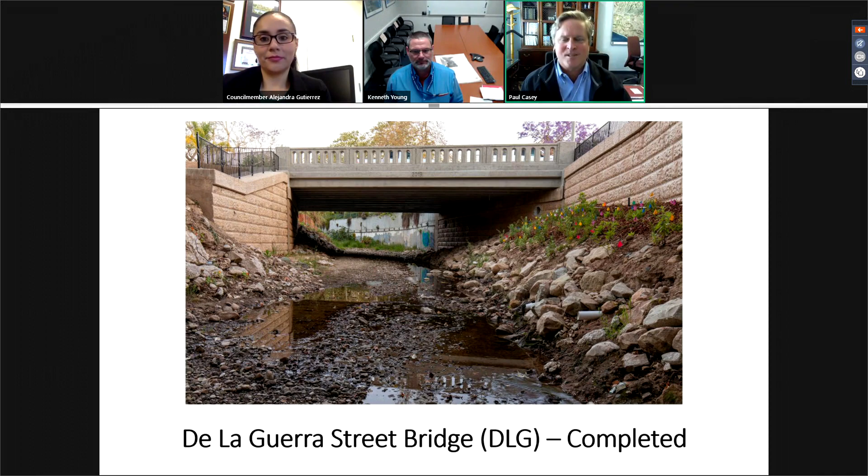We're excited to be here and to celebrate these two bridge projects and appreciate you participating today. Thank you to our partners, especially our residents, for all of your support for these critical infrastructure projects and working with us through the construction phases. Really appreciate your cooperation.

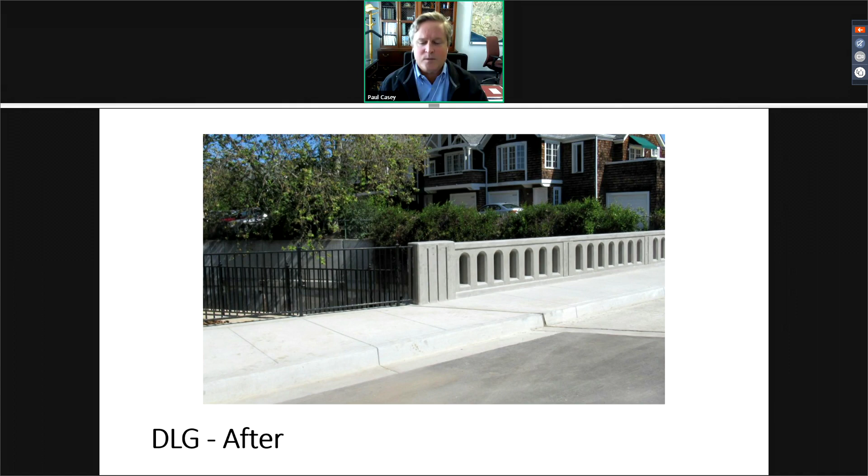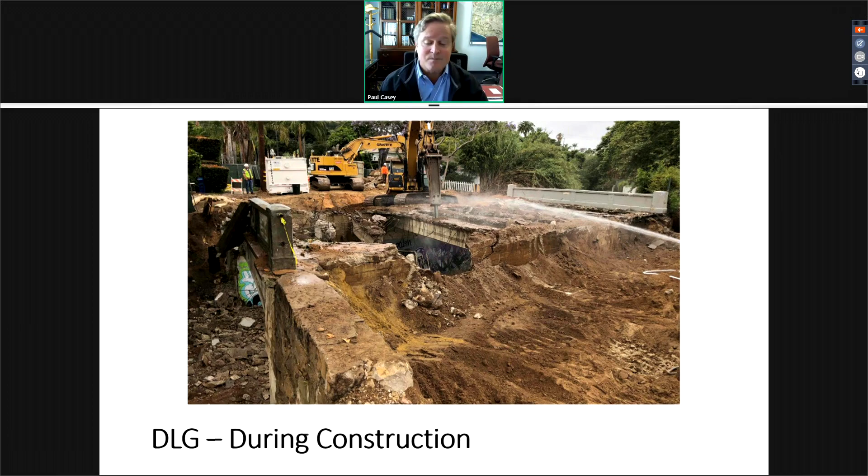Many community members and organizations participated in the development of these projects. The projects were vetted through various public meetings and the city's Architectural Board of Review, design review and approval process. They helped with the selection of the channel wall treatments and the intricate details of the bridge, including the types and color of the railings, the fence, barrier rails, and pedestrian lights installed as part of the project. These make really great architectural assets to the community that we can all appreciate and enjoy for years to come.

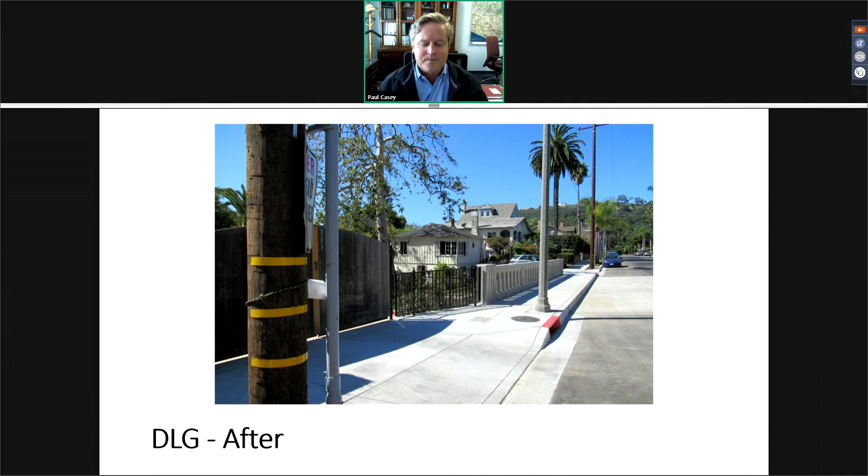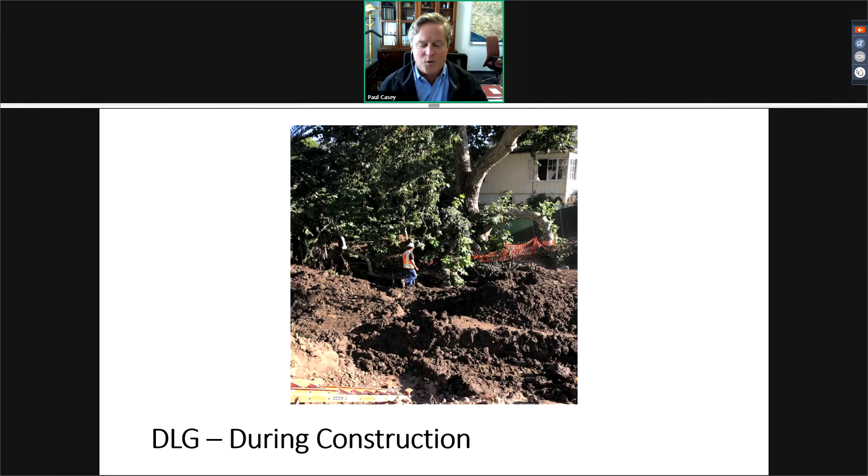Outside agency project partners have also been really great to work with, and they include the Santa Barbara County Flood Control District, Caltrans, and the Santa Barbara County Association of Governments. A special thank you to the Highway Bridge Program administered by Caltrans, which provided the funding for these important projects. Over 90% of the funding came from the bridge program, and the city received approximately $13.2 million in total grant funds to design and construct both of these bridges.

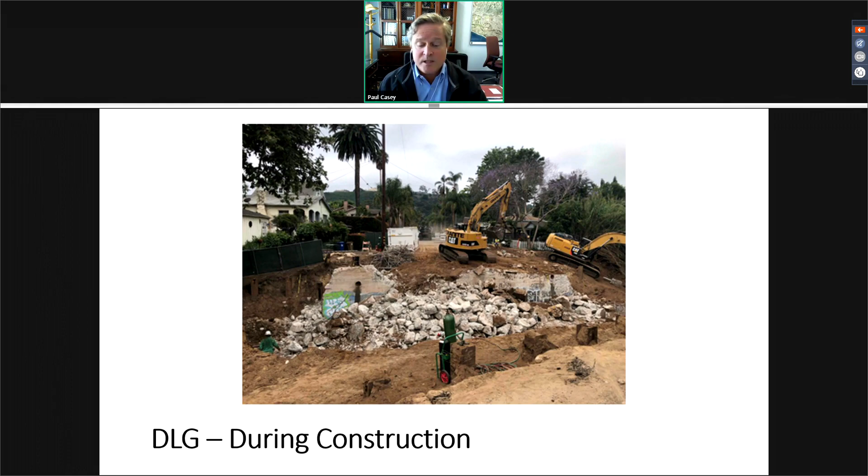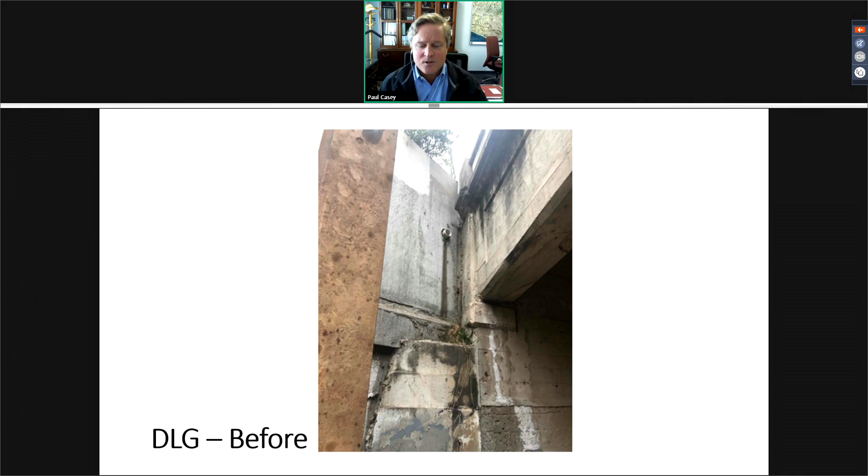Both bridges were determined to be structurally deficient based on routine inspections by Caltrans, and therefore they qualified for a complete bridge replacement under the program. Again, thank you for attending this virtual ribbon cutting, we really appreciate it. At this point, I would like to introduce Councilmember Alejandra Gutierrez, who will provide a little more background information on the Quinientos Bridge.

Thank you. We can't hear you.

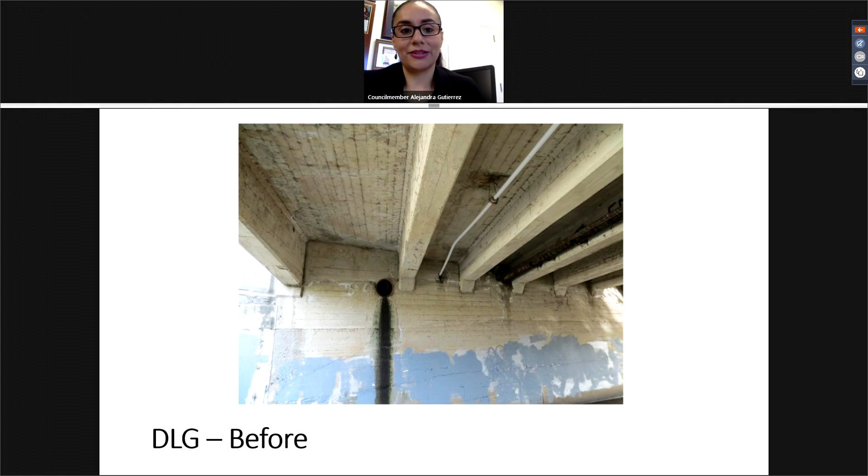Thank you, Paul, and members of the public. Special thanks to the Eastside neighborhoods for their patience and cooperation during this one-year-long construction project.

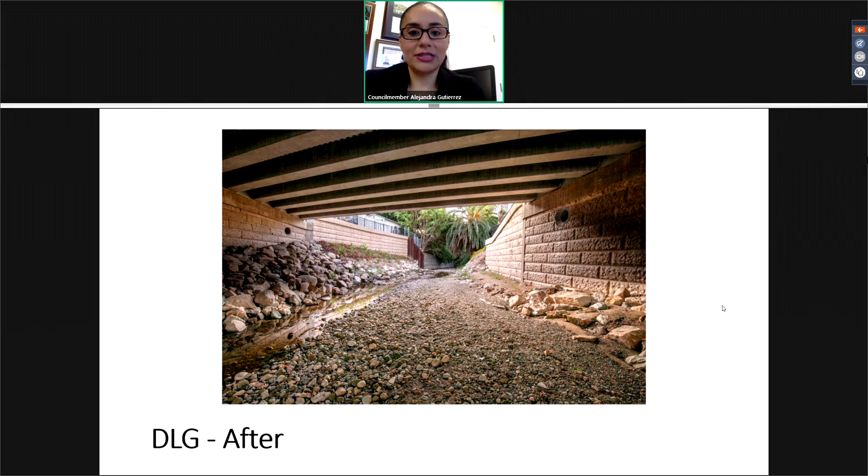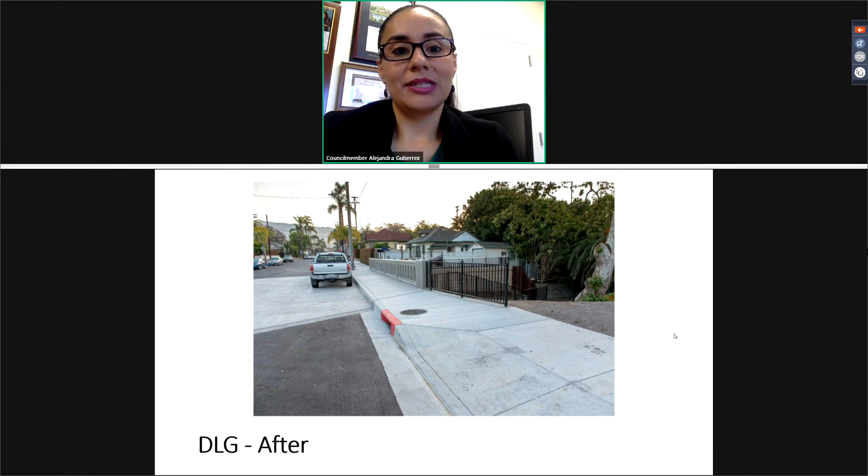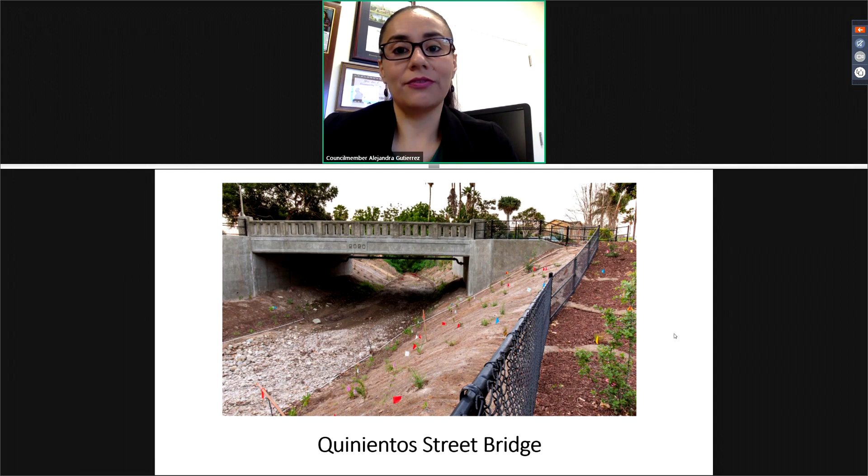The Quinientos Bridge was originally constructed in 1930. It was 36 feet long and 30 feet wide, and it was quite difficult to navigate through. The bridge was straight, but was located on a curve in the roadway, which limited the sight distance for drivers, putting one of the crosswalks on Canada Street in a blind spot. The old bridge had narrow sidewalks and didn't provide enough room for vehicles and cyclists to comfortably cross the bridge at the same time.

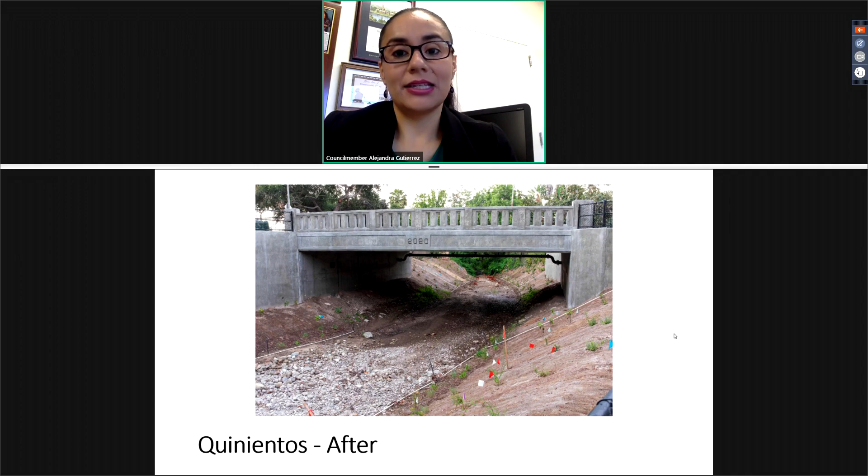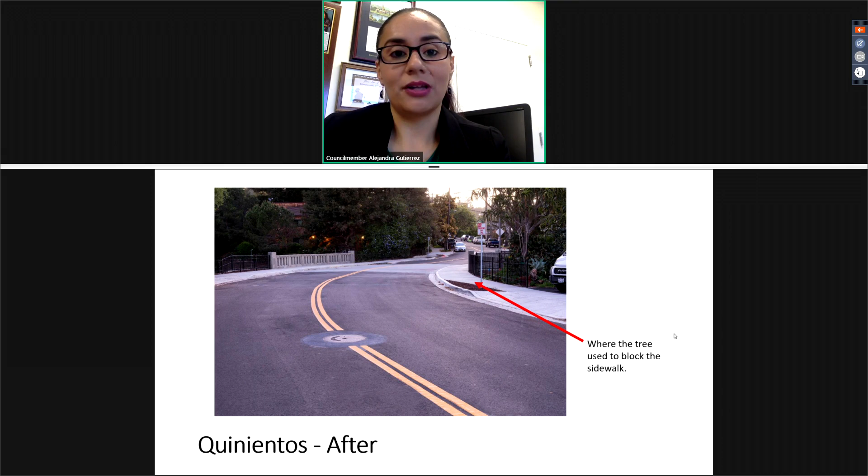The new bridge is about 45 feet long and 52 feet wide, which provides a 6 foot wide shoulder for bicyclists and a 6.5 foot wide sidewalk along both sides for pedestrians. It not only provides better sight distance for drivers, but this new bridge is designed to meet current city, state, and federal standards. The project also includes new pavement, curbs, gutters, street lights, handicap ramps, and concrete sidewalks, improvements adjacent to the replacement bridge, which include all of the safety elements to make this corridor safe for all users.

The creek banks were revegetated with local native riparian species, including plantings in all areas disturbed by construction activities. Creek restoration was also an important feature for this project. The total project cost to design and construct this project was $6.1 million. About $5 million was for construction, and the project was nearly entirely grant funded.

This is such an important project for the Eastside neighborhood, and we appreciate all of the hard work that went into it. Now I would like to introduce Mr. Ken Young, who will provide more details about the construction.

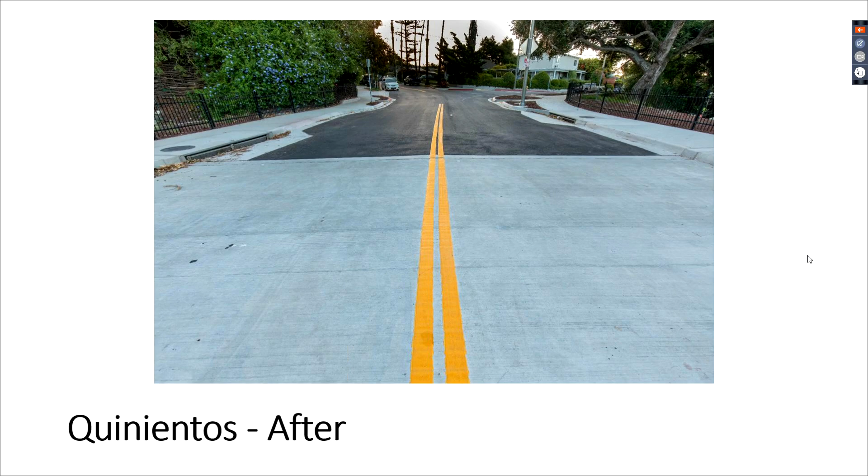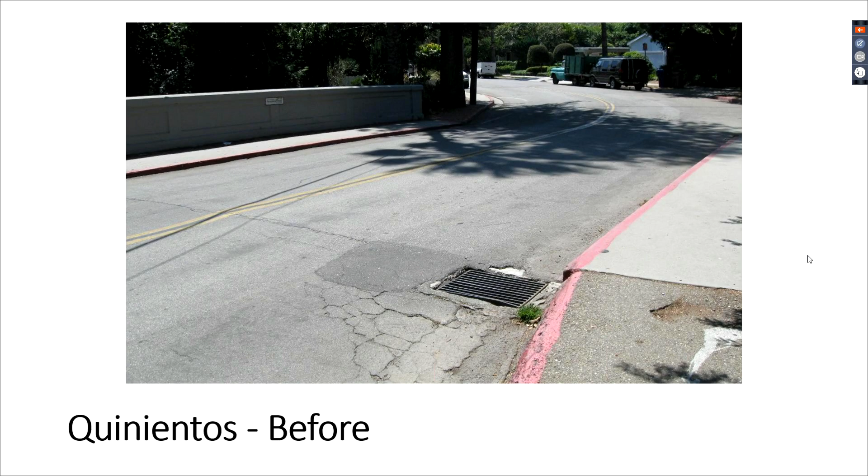Ken, you need to turn on your camera, please. Good morning, everyone. All clear, right, Rochelle?

I am Ken Young, construction manager for the construction of the Quinientos Street Bridge. Before construction even begins, you have about 8 years worth of design and planning. A lot of that happened here in this room that I'm talking to you today from.

When this project came to us, when it started just about over a year ago, we were given a lot of time constraints to be within the creek window to construct and then get out of the bridge creek. One of the interesting things that happened on this bridge is we had a bunch of birds that decided to nest under the bridge right about the time we wanted to construct it. So we had to delay the project by a few weeks to hit that window.

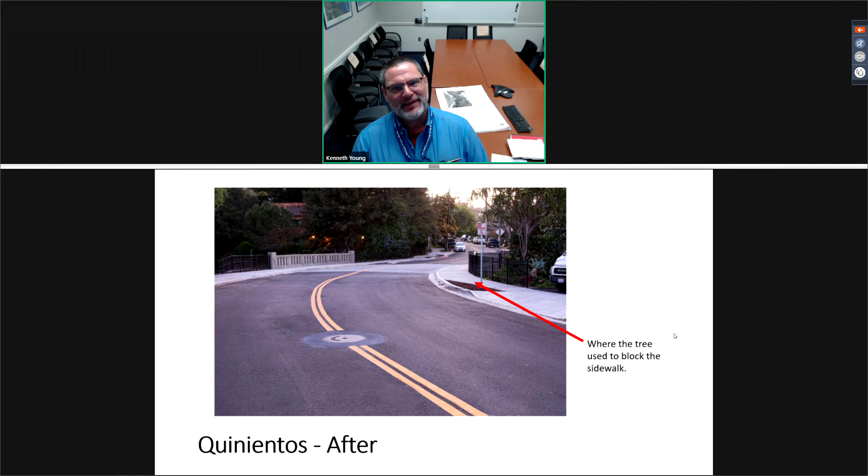In construction, we had Lash Construction. Jim Lash, Brendan McNamara, and Hector Hernandez worked very hard on getting this project going during construction, with all the tribulation that we had. They did a very excellent job, and everything pretty much ran on time.

We got a lot of help from Filippin Engineering, who was our structural representative. That would be Matt Davis. And he had 3 inspectors who worked on this job from beginning to end, that would have been Marco, Jerry Missamore, and Raul Estrada.

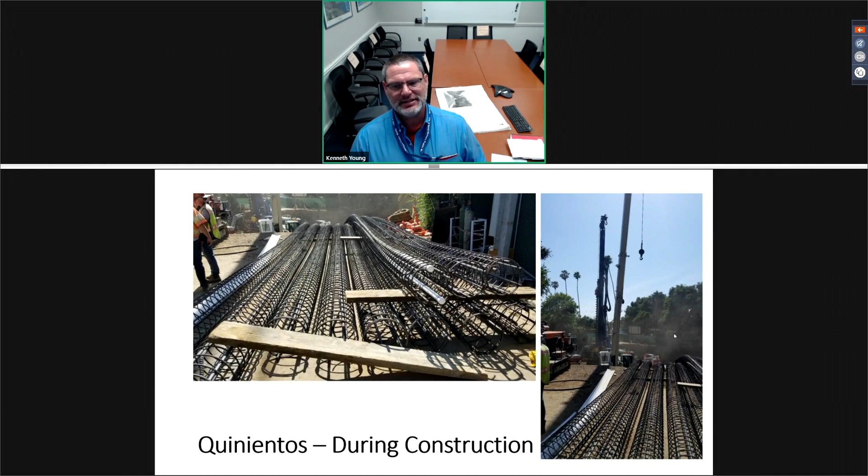Also, to verify that we were making all the compliance with the regulatory agencies, was Stephanie Lopez and Julie Love from Rincon Consultants. They did a very excellent job. Any time there was an unknown, we would call them up and say, hey, is it okay for us to trim the tree here? Is our red-legged frog where it needs to be?

On city staff, there's a few people that need to be recognized. That would be Ruby and Sarah Isa, who helped us with all the permit requirements. And then also Alex and Regina worked on the construction management side, getting things going with typing minutes and coordination efforts.

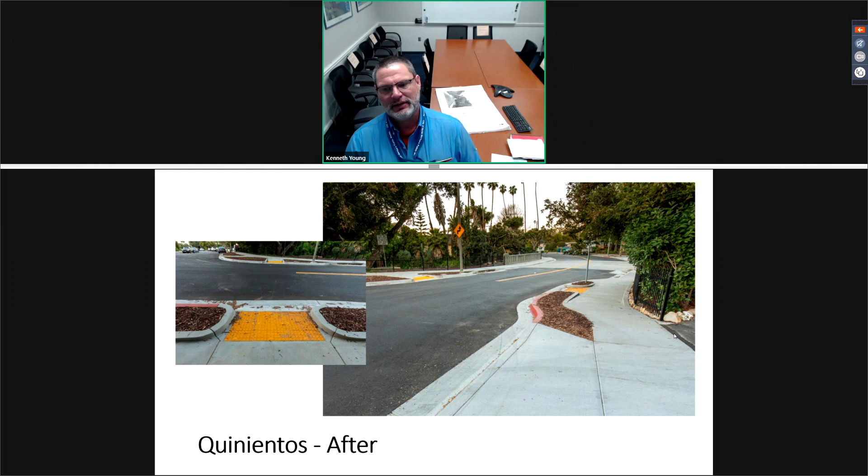At this time, we also like to make a specific thanks to the East Side neighborhood and Caltrans local assistance, Heidi Borders and Leaf Corlell, and they did a wonderful job.

Thank you guys for participating in this unconventional ribbon cutting, and go check out the bridge to be in the outdoors. And then good luck to all of you.

And at this time, I would like to introduce Councilmember Megan Harmon.

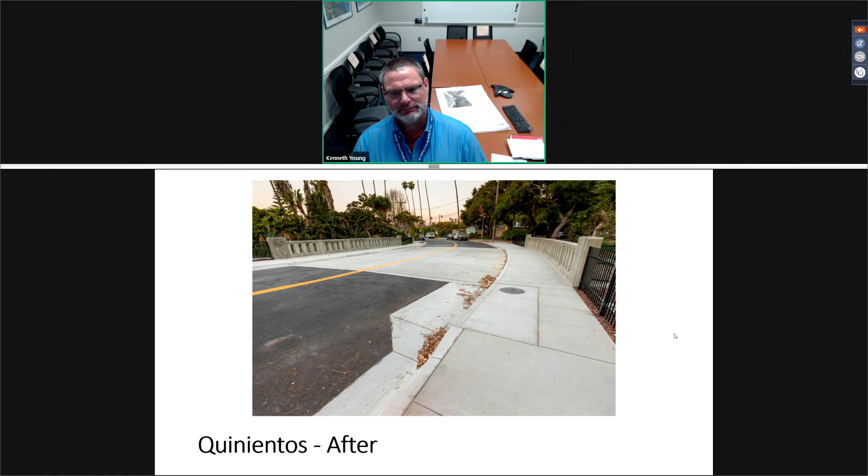Thank you so much, Ken, and thanks to all of you for being here. It is a little bit different, as Ken said, for us to be doing a ribbon cutting virtually, but I'm so excited that we are still taking the time to celebrate these kinds of projects, because this is really the heart of what we do at the city, and it's what makes our community so awesome. Our commitment to keeping everything looking good, and most importantly, keeping it safe for our neighbors.

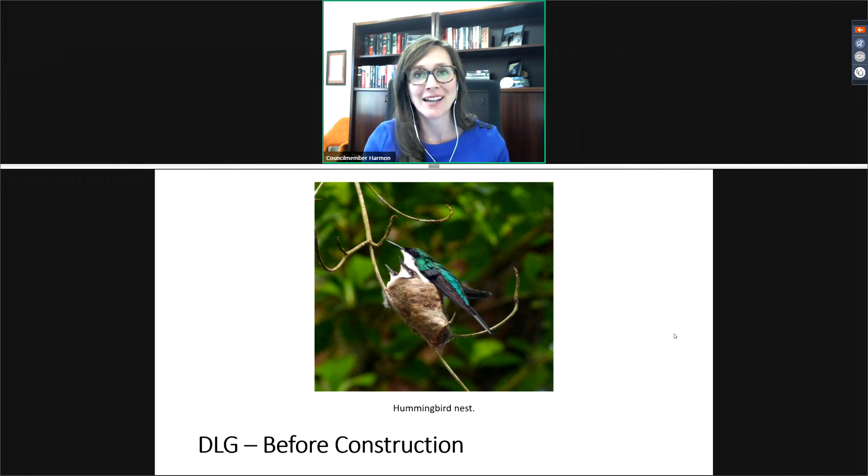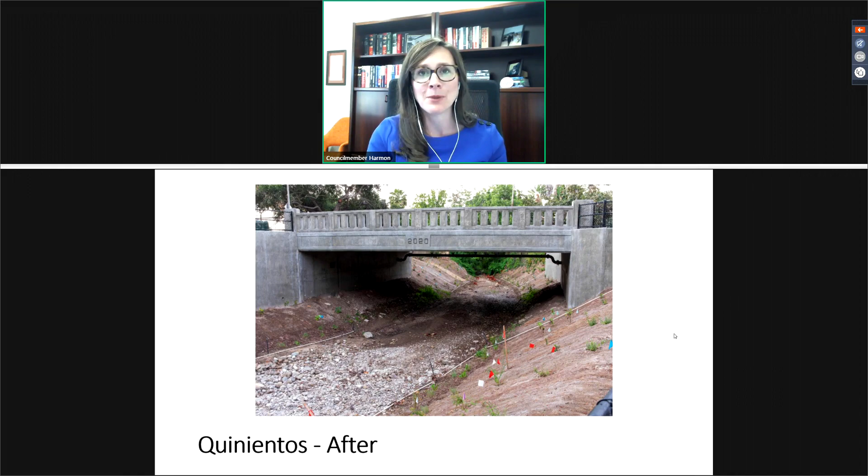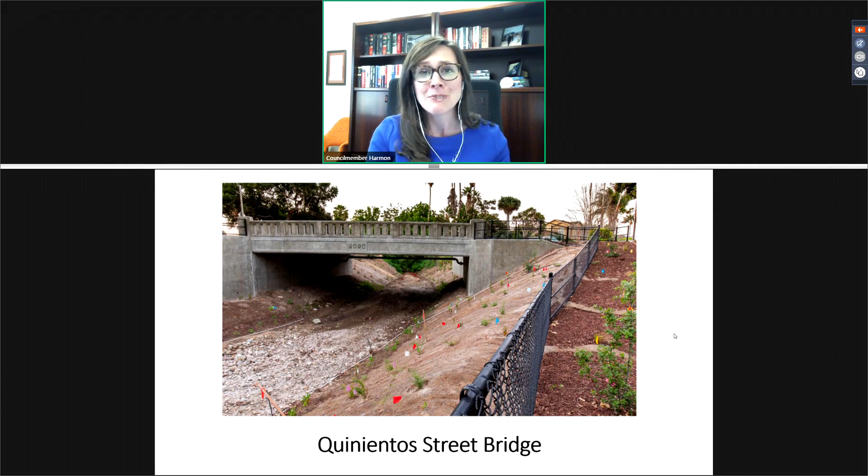So on that note, I'm going to start by thanking our downtown residents and the downtown neighbors of the De La Guerra Bridge. I actually live in that neighborhood myself, so I totally understand the level of patience and cooperation that was required from the surrounding neighbors to get through this project. But it's certainly all worth it now when we see the incredible craftsmanship of the bridge. It's made a huge difference in our neighborhood, both in terms of safety and in terms of aesthetic. It looks awesome. So I know we're all so grateful and really excited about it.

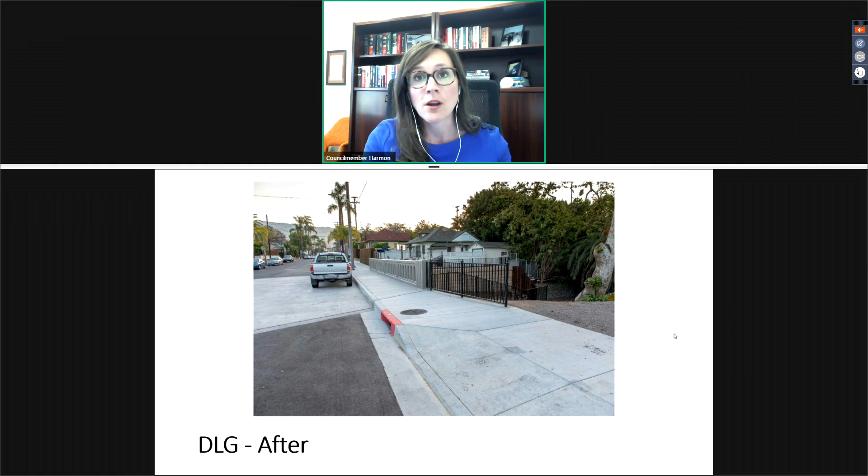So I want to just share a few details with all of you about the De La Guerra Street Bridge. It was originally built in 1914. It was 31 feet long and approximately 60 feet wide. I'm told that the deck was severely deteriorated, and that's why we qualified for the funding for a complete replacement. So it's good we did this project when we did.

The new bridge is 61 feet long and 55 feet wide, large enough to carry at least 3,400 cubic feet per second of design flow of Mission Creek. I don't really know what that means, but I'm told it's a very good thing.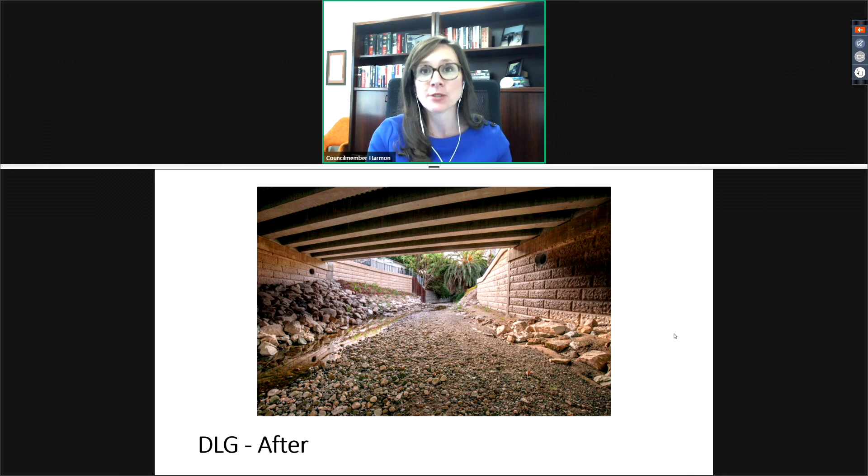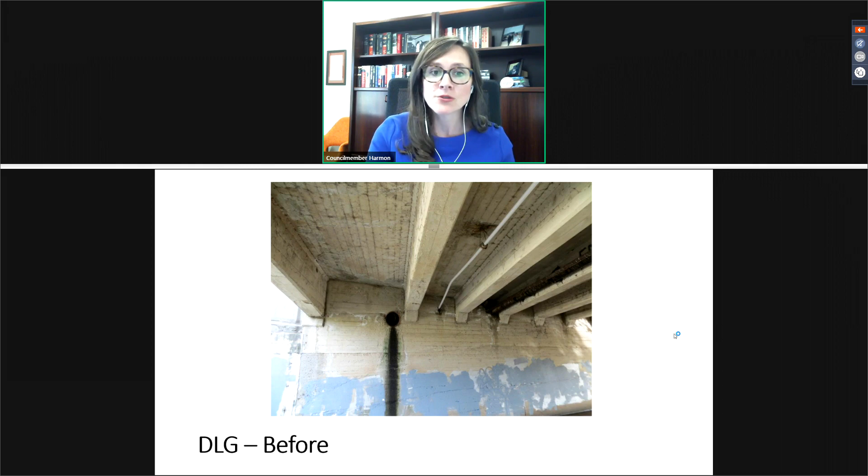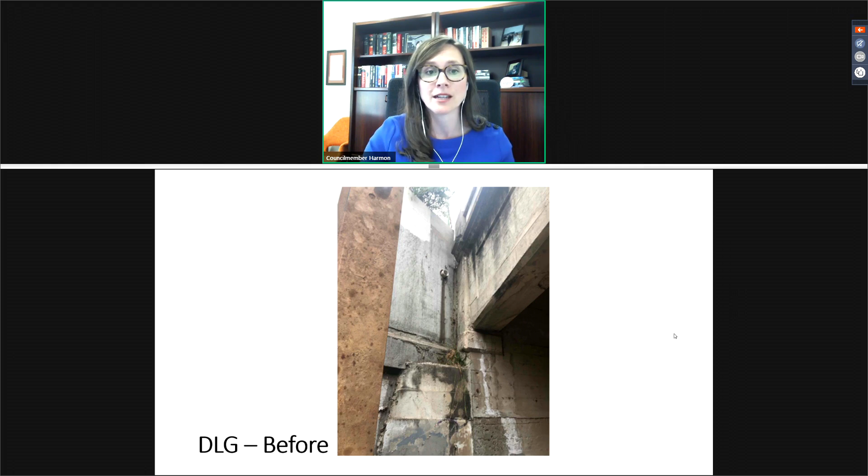The completion of this bridge not only fulfills the transportation safety elements, but it also fulfills the intent of the Lower Mission Creek Flood Control Project, which has been a really cool joint effort between the city, county flood control, and U.S. Army Corps of Engineers. The purpose of that is to make sure that we have flood reduction along Lower Mission Creek so that all of us that live in the surrounding neighborhoods can stay safe in the event of a flood.

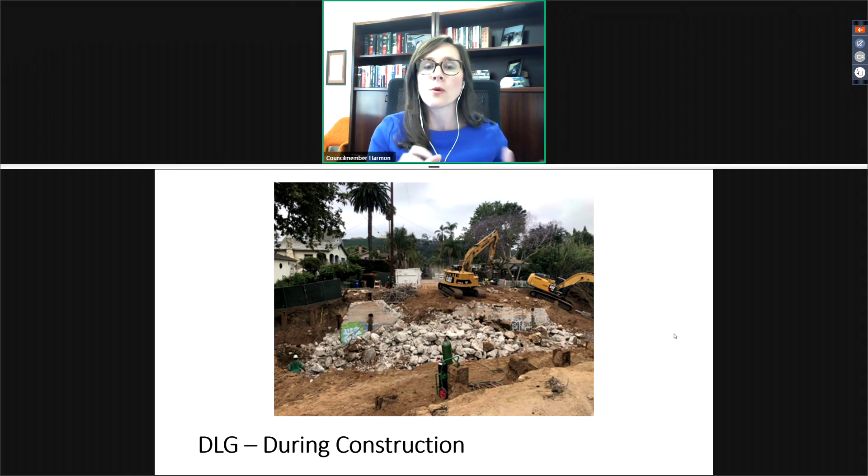So what this actually means tangibly is that the project is to widen the Lower Mission Creek channel, and that increases flood capacity. So what that means is flooding will be reduced and property damage to the surrounding areas will be reduced as well.

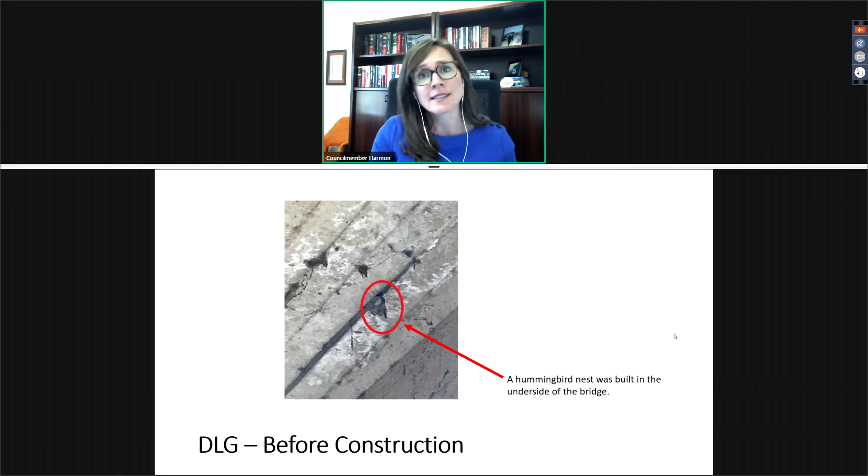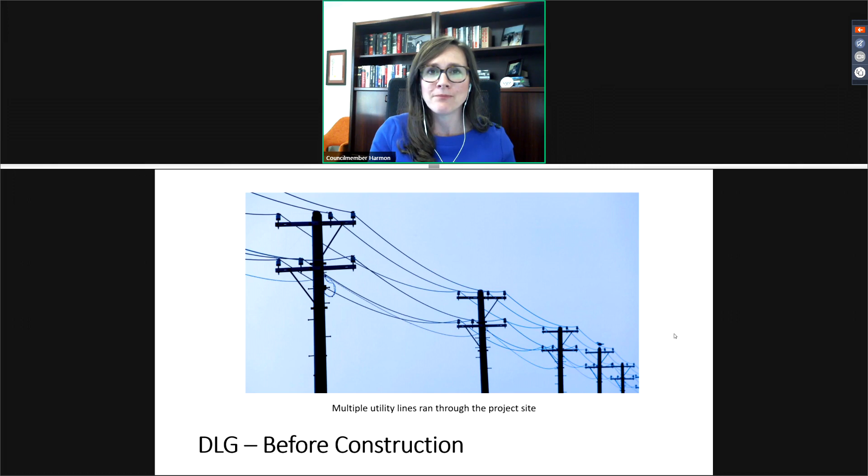And it gives us the opportunity to rehab the creek as well as to make specific habitat enhancements, which is really important to us as a community. We are certainly concerned with property damage and want to keep everyone safe, but we also want to care for our environment and make sure we really think about how we're sharing this earth and do what we can to protect our natural habitats.

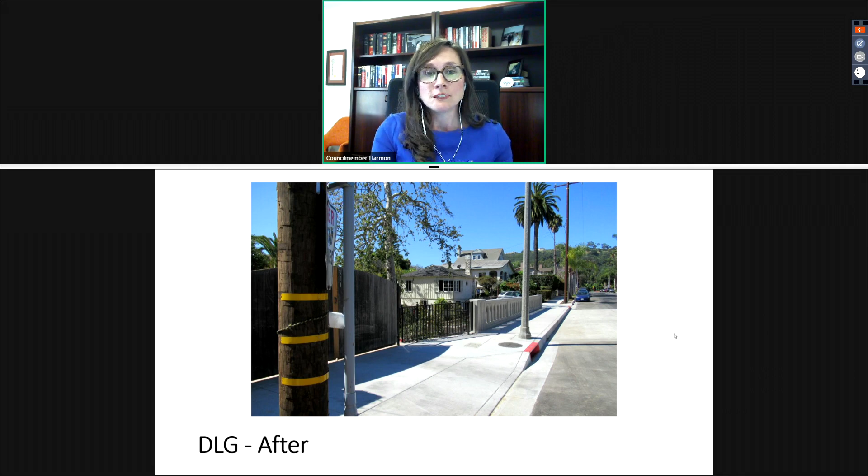This effort is really cool. It spans approximately 1.3 miles of Lower Mission Creek, starting from Cabrillo Boulevard and going all the way to Canon Perdido Street. We at the city, along with the county, are committed to moving forward with completing the design and construction of the project with grants and local funds in affordable increments of work.

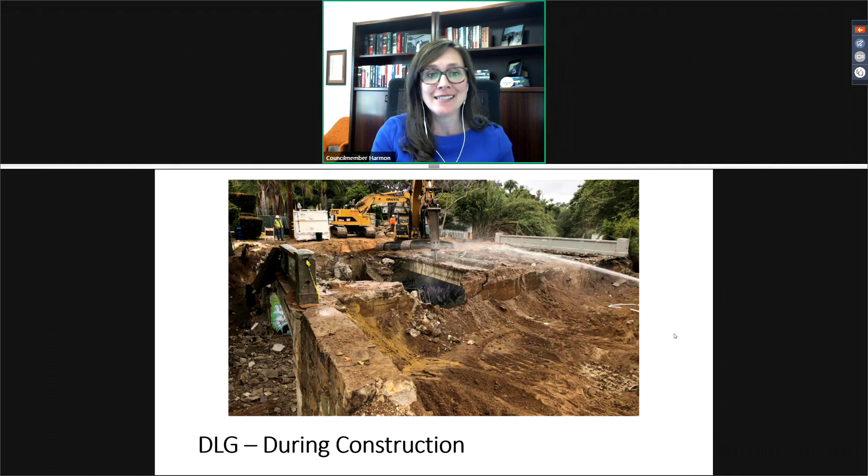Progress has really been made. I'm really excited to say that this is actually the 7th bridge replacement as part of that whole effort since 2011. That's a really big deal. The bridges replaced so far include Haley, Ortega, Chapala, Cota, Mason, Cabrillo, and now the De La Guerra Street Bridge. The county's also completed a number of channel reach widening projects, and they continue to make good progress.

They also have plans to construct and widen portions of the channel reach just north of Highway 101 to the upstream end of the Gutierrez Street Bridge next summer. So we really look forward to that.

I just will close by thanking everyone who was involved in this project: city staff, construction, design. It really was a team effort. Thank you to the neighbors who were so cooperative and patient. This is a win for those of us that live downtown. It's really something to be celebrated, and I'm so happy that we're taking the time to do that today.

Now, I'd like to introduce the construction manager, Laura Yanez, who's going to give you all a few more details about the De La Guerra Street Bridge.

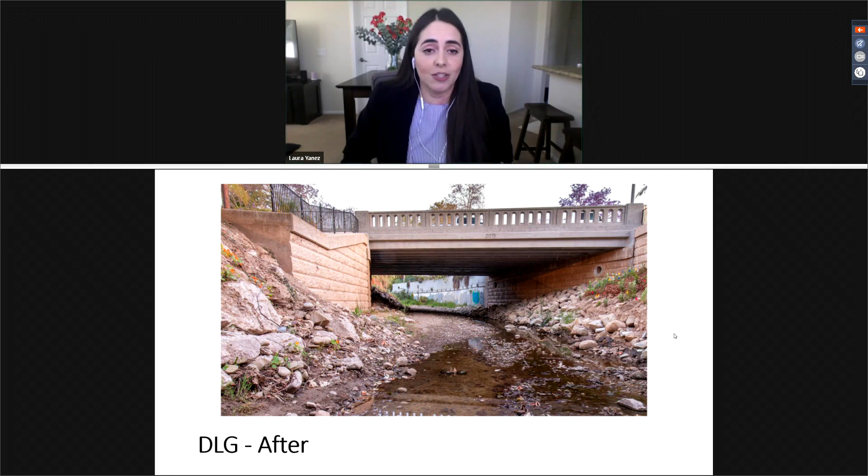Thank you, Councilmember Harmon. Good morning. It is with great pleasure that we meet today for this virtual ribbon cutting for the De La Guerra Street Bridge project. It is also National Engineers Week, so definitely a great week to celebrate the accomplishment of the Public Works Department.

This project came to fruition thanks to the hard work and collaboration of many. The 5-year design project, led by Jim Colton, the city's project manager, and Drake Haglan and Associates, the prime design consultant, had a number of challenges to overcome, from coordinating with multiple utility companies to achieve the necessary utility relocations, to finding a way to save an existing 100-year-old sycamore tree that is an icon to the neighborhood.

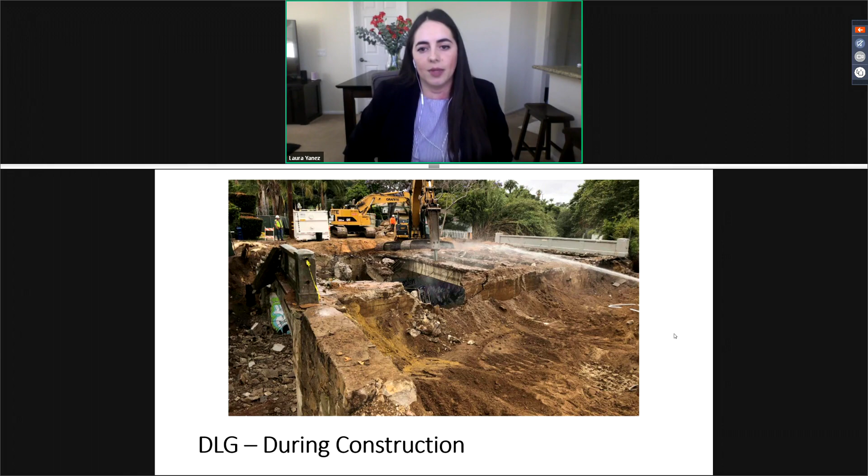The team worked with the city's Creeks Division to incorporate stormwater treatment, as well as with county flood control to accommodate future widening of Mission Creek. Planning staff assisted with obtaining CEQA clearance and navigating the design review process. The Architectural Board of Review, as well as the neighbors, worked closely with the team to ensure the project was also aesthetically pleasing and the right fit for the neighborhood.

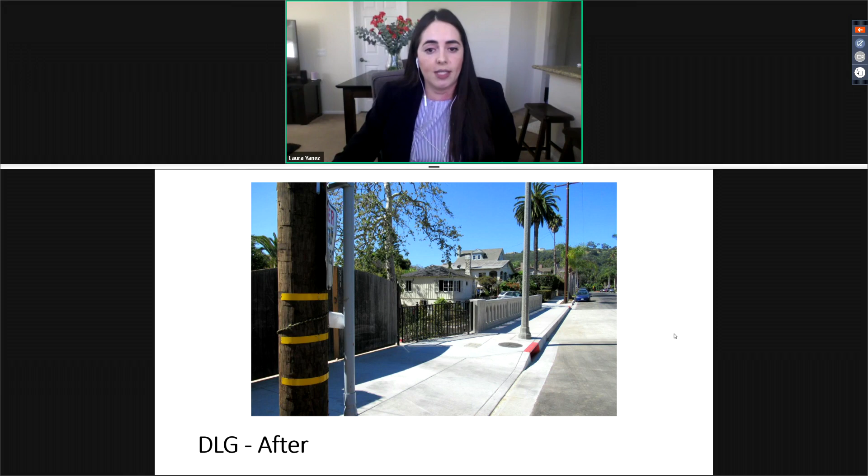Real property staff worked with each of the property owners adjacent to the bridge to obtain temporary construction easements, and Caltrans, the state oversight agency, provided NEPA clearance, approvals of the structure design, and authorized the various funding phases. As you can see, not only do you need a bridge designer, but also the coordination and collaboration of many during the design phase of a project.

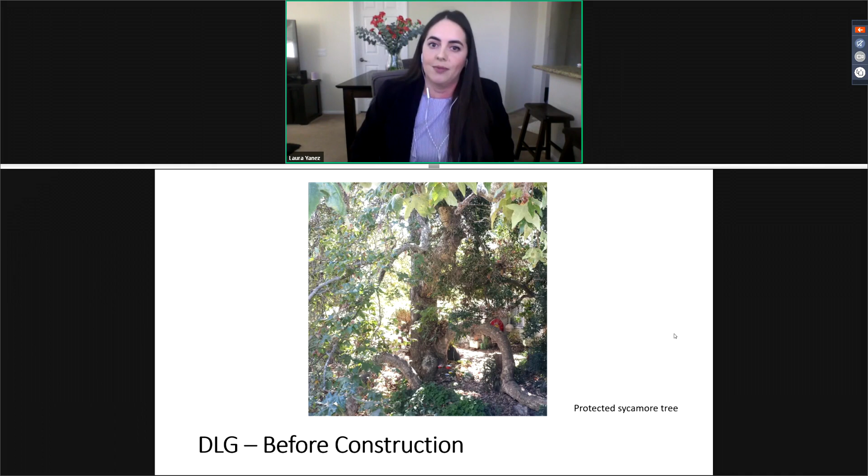Finally, in 2019, with our contractor Granite Construction and Filippin Engineering as construction management consultant, we were finally ready to break ground, only to be halted by yet another hummingbird—not the same one from Quinientos Street Bridge, but likely its distant relative. This hummingbird decided to make its nest under the bridge deck that was about to be demolished, and after approximately 3 weeks, gave birth to 2 baby hummingbirds, which are almost a year old now, so happy early birthday to the hummingbirds.

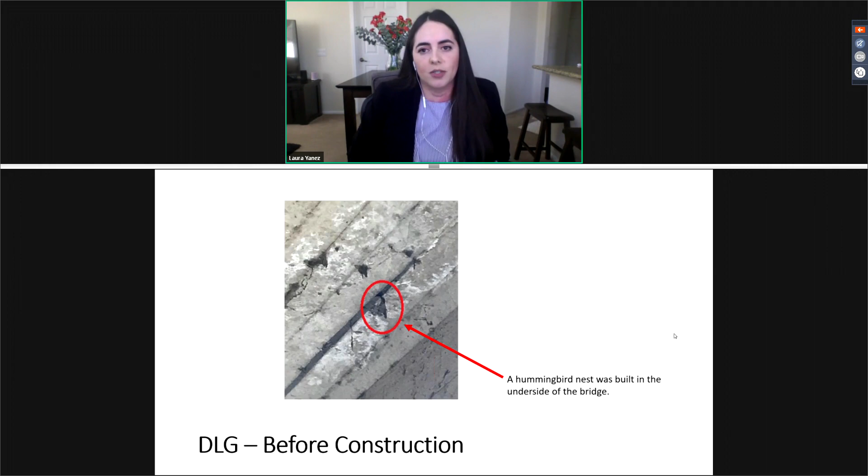Construction was completed in approximately 10 months for a total construction cost of about $7.2 million. Like design, construction had its own complexities as well. Not only did the contractor have to work around the sycamore tree that had to be protected in place, but they also had a relatively small work site, which made constructing the 16 cast-in-drilled-hole piles very challenging.

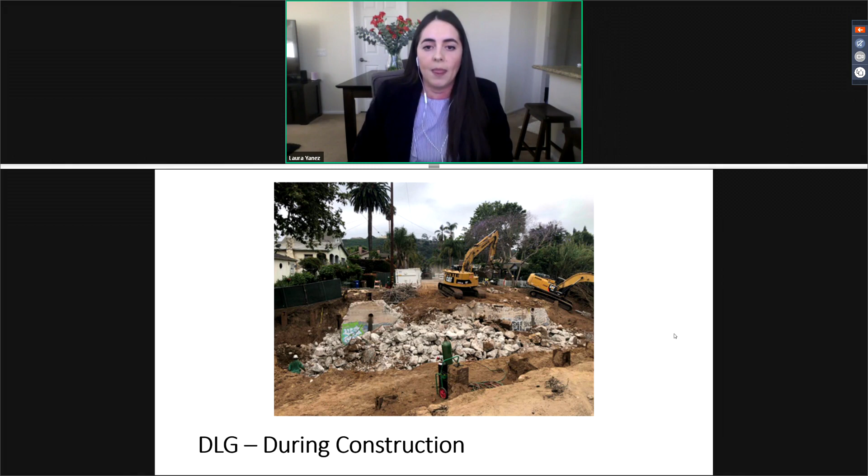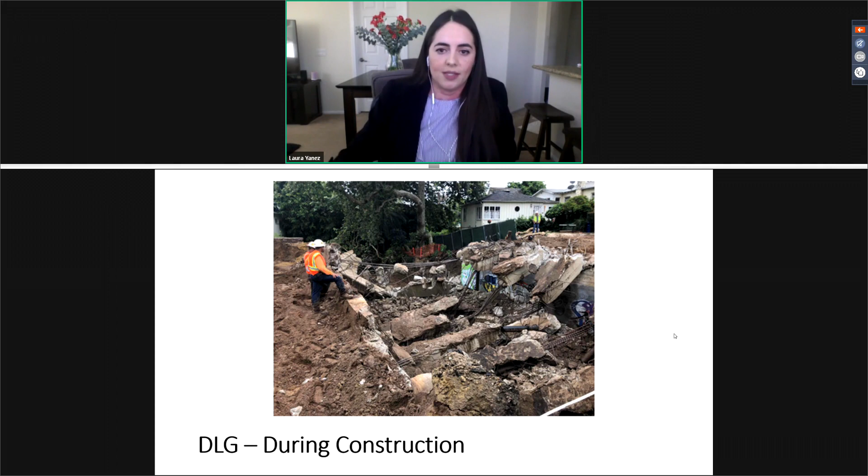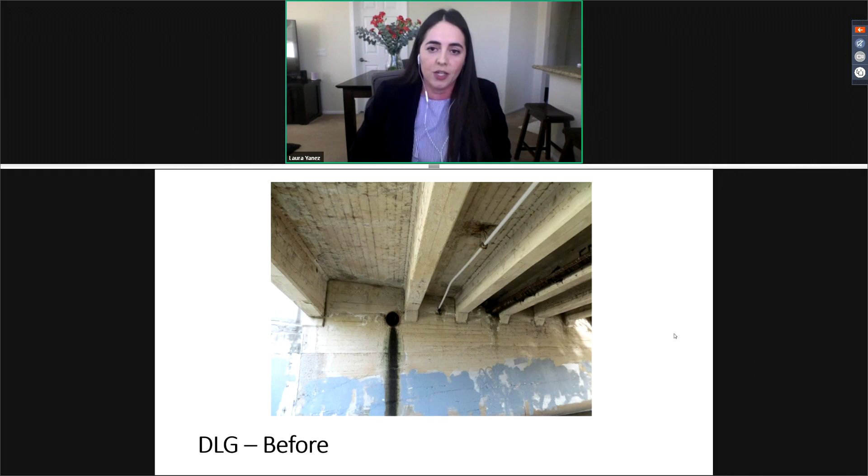Despite all the challenges, Granite and Filippin Engineering were able to put the puzzle pieces together and complete the project ahead of schedule. So I'd like to thank the residents of the De La Guerra Street Bridge and the surrounding neighborhood for all of their patience in dealing with the constant disruption over the past year. I'd like to specifically thank Ruth, Andy, John, and the residents of the De La Guerra Square Association, as their homes were directly adjacent to the corners of the bridge and construction was basically in their front lawn.

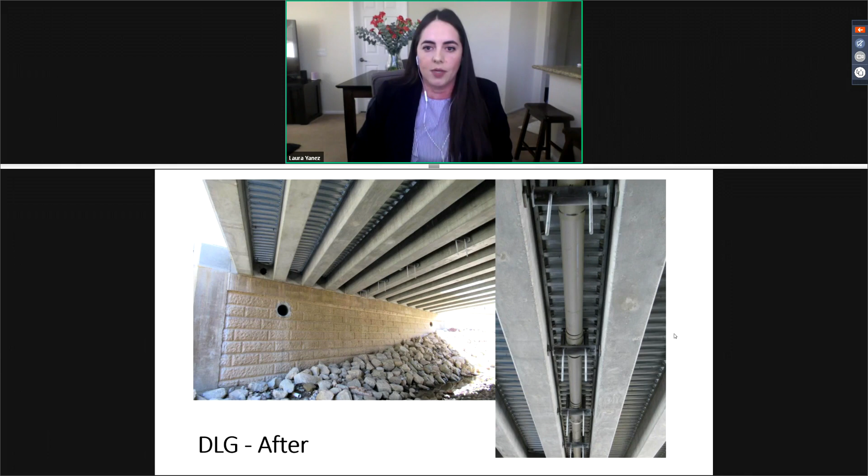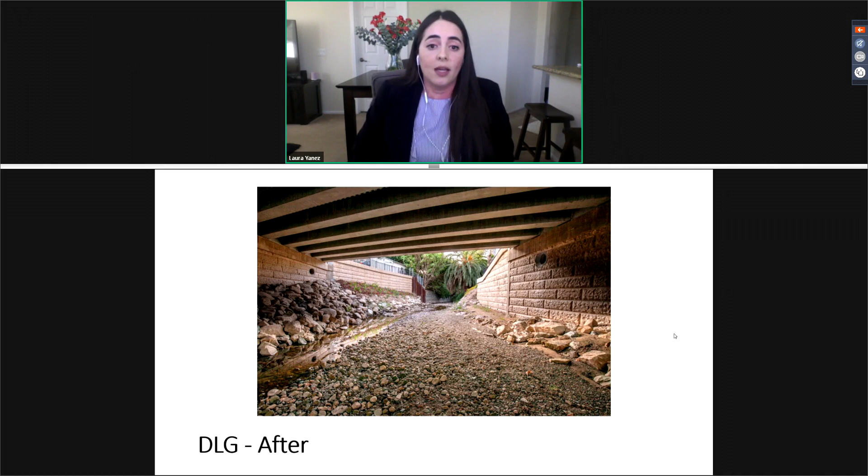I'd also like to thank Craig Drake and Stacy Randall with Drake Haglan and Associates, as well as Vanetta and Associates for designing the project. Thank you to Veronica McHugh, Martin Nunez, and Lupe from Granite Construction. Thank you to Rosie Thompson and Hannah Donaghy from Cardno, who provided environmental monitoring throughout the project. And thank you to Kelly Wheeler, Raul Estrada, and Fernando Perez for managing the construction on behalf of the city day in and day out.

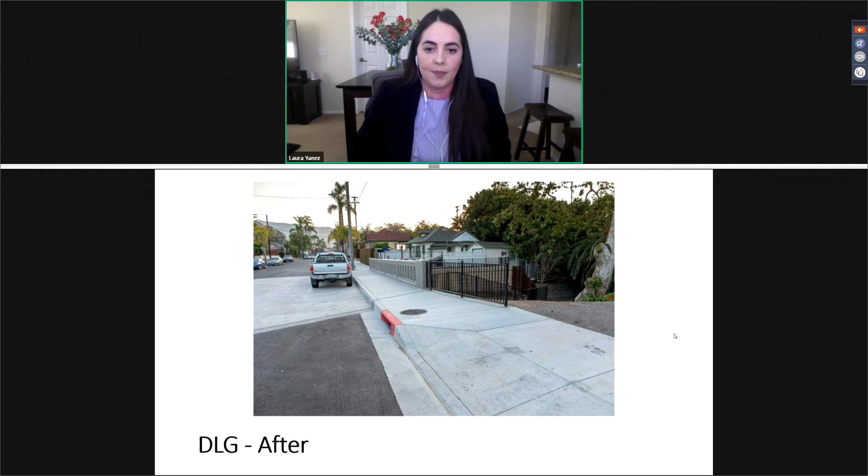Thank you to Leif Kohler and Heidi Borders with Caltrans Local Assistance. And finally, thank you to the City of Santa Barbara in-house staff, Brian Damore, John Owaziak, Pat Kelly, Derek Bailey, Ashley Shue, Alex Ubaldo, David Thornburg, Jessica Grant, Rob Dayton, Kathy Kennedy, and Ruby Rajbanshi, who all helped deliver this project. I am very proud to have been a part of the project and look forward to driving over the De La Guerra Street Bridge for many years to come.

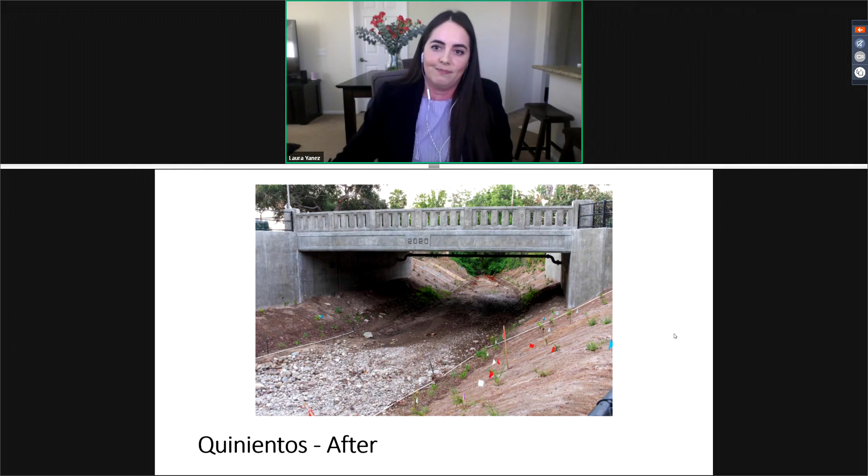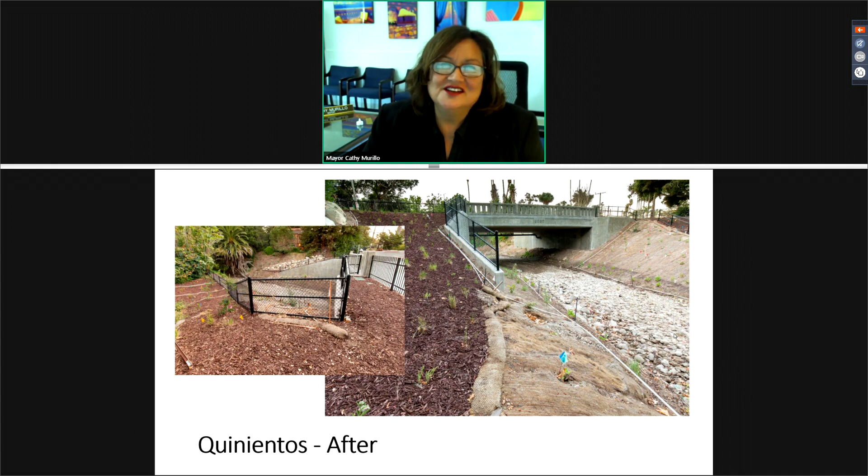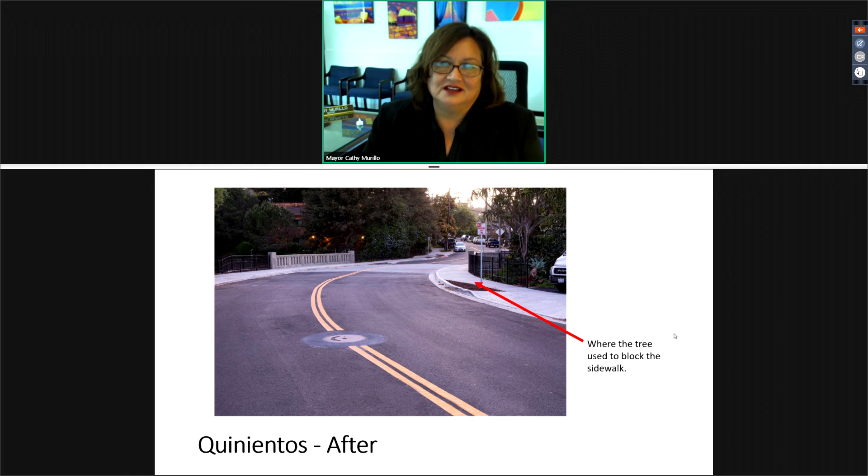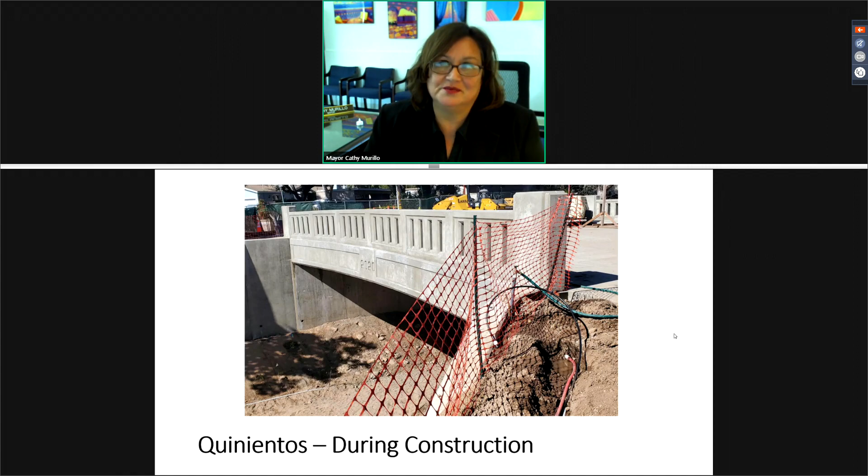Thank you, Ms. Yanez, and thank you everyone for attending the ribbon cutting in celebration of these wonderful projects. I can only echo the suggestion of anyone watching this to please drive by and go check out the new bridges. Beautiful, there's trees, it's natural, it's beautiful. And of course, we love our residents who live in the area and put up with the construction all this time. So both bridge replacements truly improve neighborhood livability by addressing pedestrian and traffic safety issues and the barriers that were there for the residents.

These projects are so important to the community, especially in each of these neighborhoods in the East Side and downtown, where we have one of the highest concentrations of pedestrian activity and bicycle commuters in the city. So the need for safe infrastructure is critical. Thank you to the County of Santa Barbara for working with us on this joint effort to reduce flooding and provide creek rehabilitation. These projects fulfill elements of the city's adopted pedestrian master plan and bicycle master plan, which encourage more people to walk and ride bikes in the neighborhoods. We look forward to completing more of these safety projects in our city.

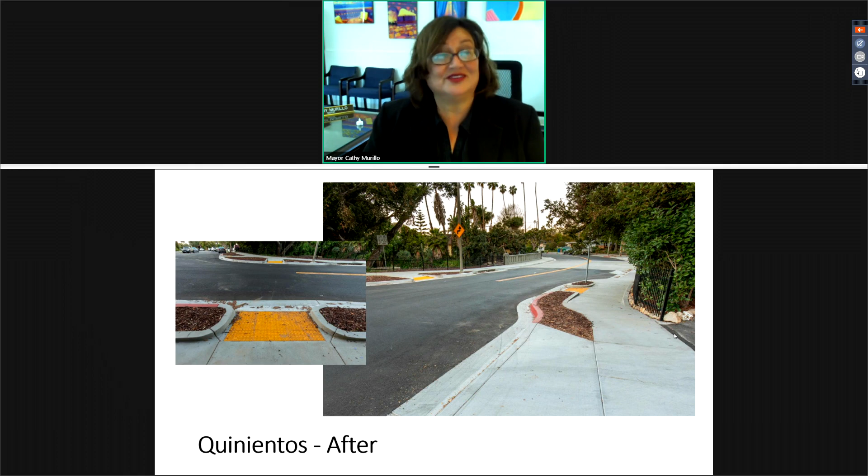Another project we anticipate is the Las Positas and Modoc Road multi-use path project, and we may break ground on that this summer. So that's a teaser for you. Las Positas and Modoc is another important upcoming construction project that is mostly funded by active transportation program grant funds. So that's state funding.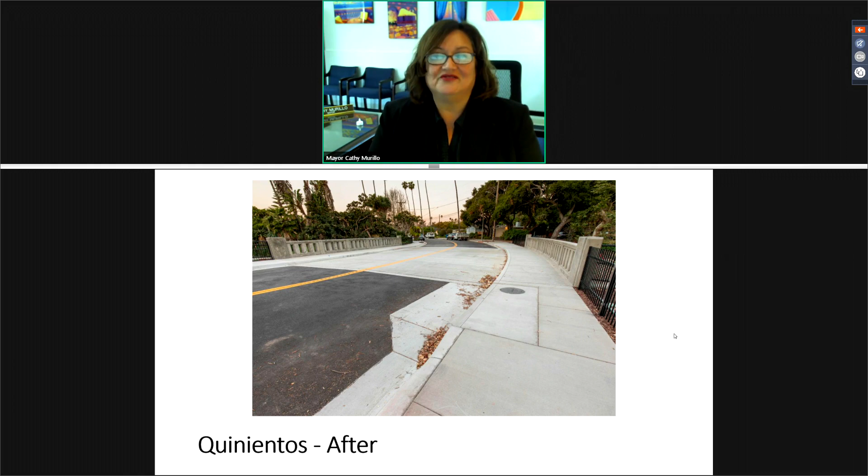Today we celebrate beautiful new bridges on our east side and our downtown. And now we have an informative and entertaining video of our virtual ribbon cutting. Roll the video, please.

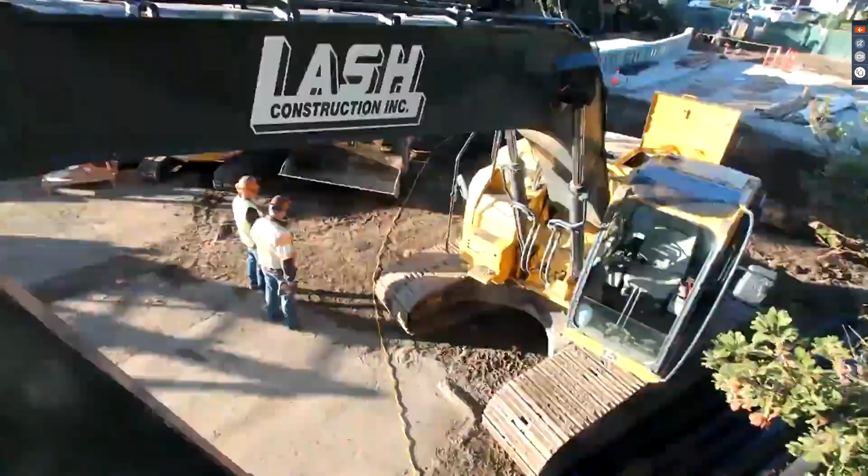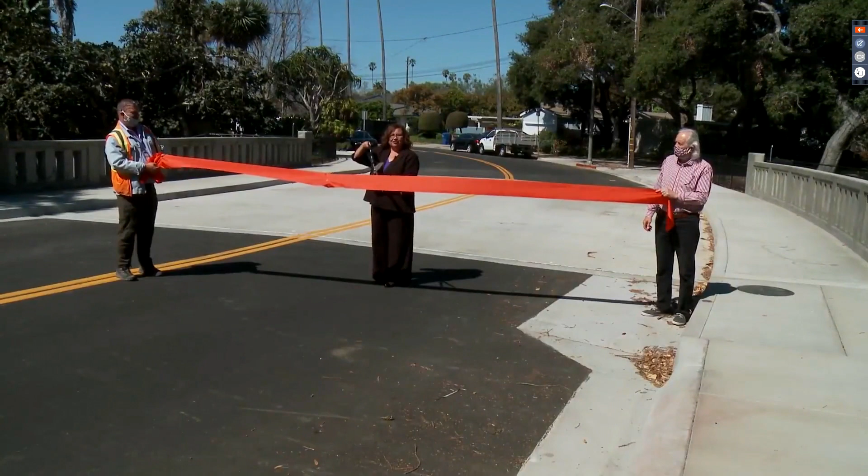It is with great pride in our Creeks Division, our Public Works Department, our East Side community, and everyone who lives here in the Quinientos Street area that I cut this ribbon today, celebrating the opening of this new beautiful bridge. 3, 2, 1. Yay!

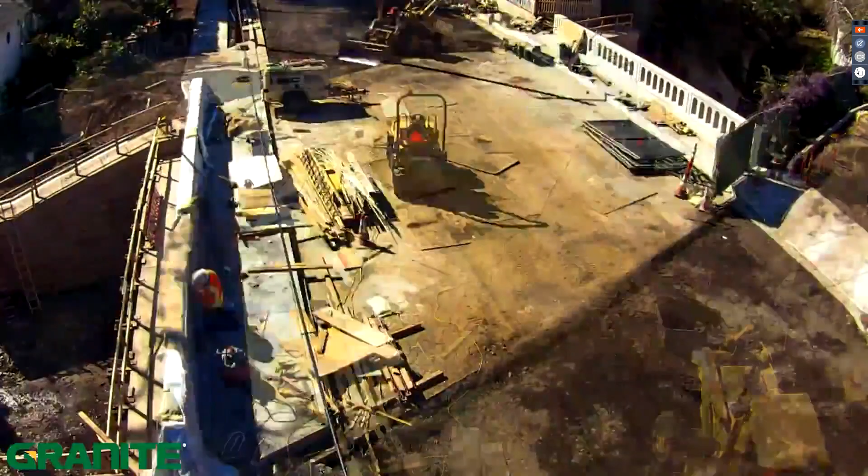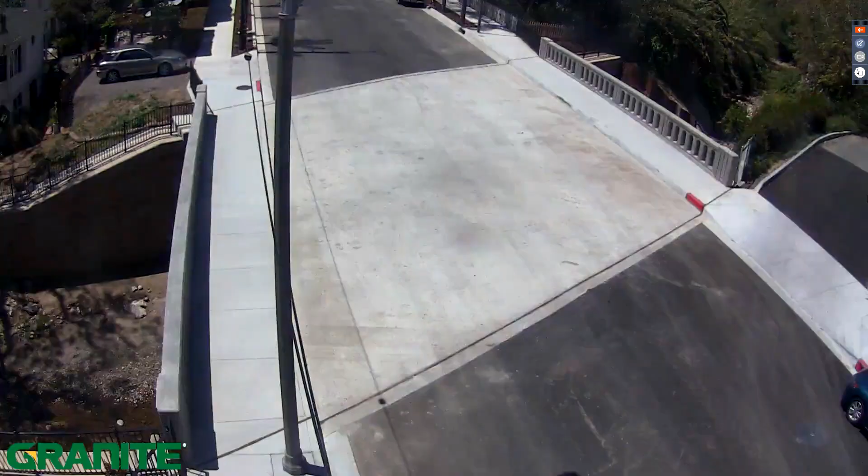It's with great pride that I cut this ribbon today. This project protects the environment, improves water conveyance, and it really graces this beautiful downtown neighborhood. So on the count of three. 3, 2, 1. Yay!